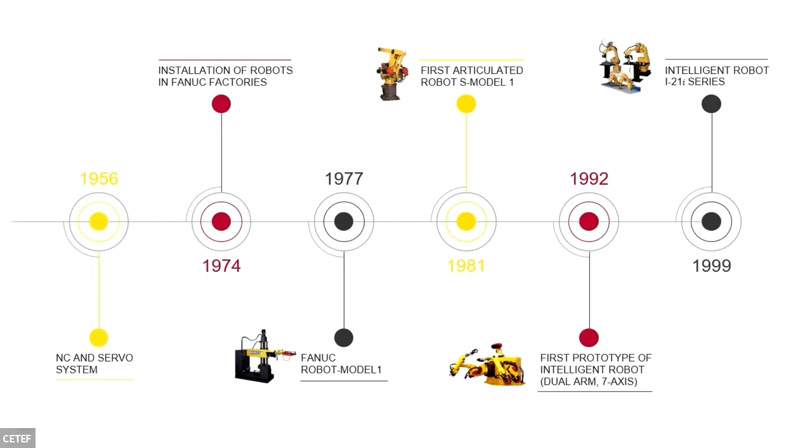Next, very quickly, 1992 was the prototype of the first so-called intelligent robot. What do I mean by intelligent robot? The intelligent robot is one that can observe the environment, measure things, sense and collect data, and take decisions on that basis. I will explain that a little bit later on. So it was the prototype of the first intelligent robot. 1999 is actually the first complete industrial series of intelligent robots. Let's have a look at what came further.

Starting from 2000, this series of R2000 robots is actually the most common and most popular of the FANUC robot family. These robots are mainly used in automotive tier 1, but not only - for spot welding, for heavy handling applications, these robots can handle up to, nowadays, 270 kilograms of payload. In 2003, FANUC moved on a little bit and created the first system without a human operator, for machine tending - the robot was standing in front of the milling center and was loading and unloading the part into and from the milling center.

2008 is the super heavy payload robots, the M2000. This is interesting, this kind of robot, my favorite actually, these are handling the biggest payloads in the world right now. This biggest unit can handle up to 2,300 kilograms of payload nowadays, and by the way, this is still the world record.

Later on, 2009, the Genkotsu robots. These are the Delta robots. You'll see some video examples in a couple of minutes. So these are quick robots, parallel linked robot arms for quick sorting, pick and place, and so on, for every operation that requires a really short cycle time.

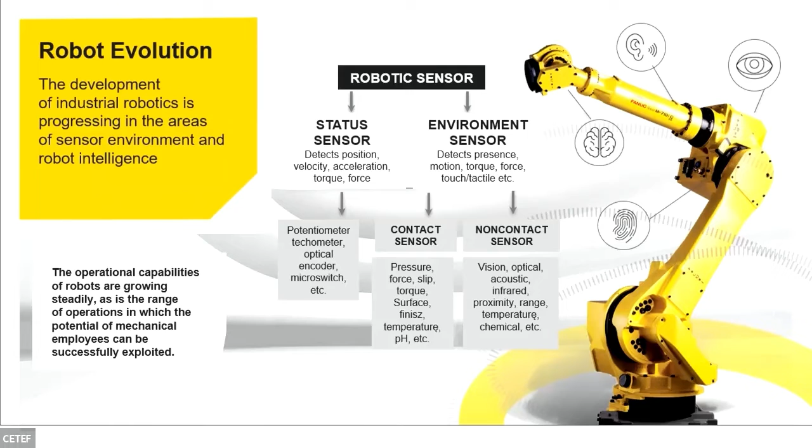But please note that during all of these years in the past, we noticed that mechanics is not as important anymore. Of course producers are still trying to design compact, lightweight robots and so on, but what is really important now is the software - the powerful software. As Jędrzej mentioned, artificial intelligence, all the sensing equipment - producers, with FANUC on top, decided to go with highly advanced algorithms to give the robots the possibility to feel their environment and make the proper decision on that basis.

But still, regarding the role of robots in modern industry, I think you're all aware that the design of robots, their construction, and the new models are dedicated to, or designed indirectly by, the market requirements. The market decided they want flexible robots. For example, it's no longer sufficient to have a robot performing the same task 24 hours and doing nothing else. What's really important and powerful now is, for example, the possibility to move the robot from one place to another and quickly adapt it to a completely new task. This is what really counts now.

For example, for this we have the collaborative series with the graphical teaching method, moving the robot arm and teaching the program like that, without writing any program commands. So this is really important now.

For sure, robots are still designed for handling heavier tasks, dangerous tasks. The robot can really help production plants deal with market fluctuations, especially with the lack of human resources. And what is the future? Again, working side by side, shoulder to shoulder with the human operator - that really might be the future. But we still have to remember, for some dedicated operations collaborative robots are perfect, for others they are not. We'll still have some examples.

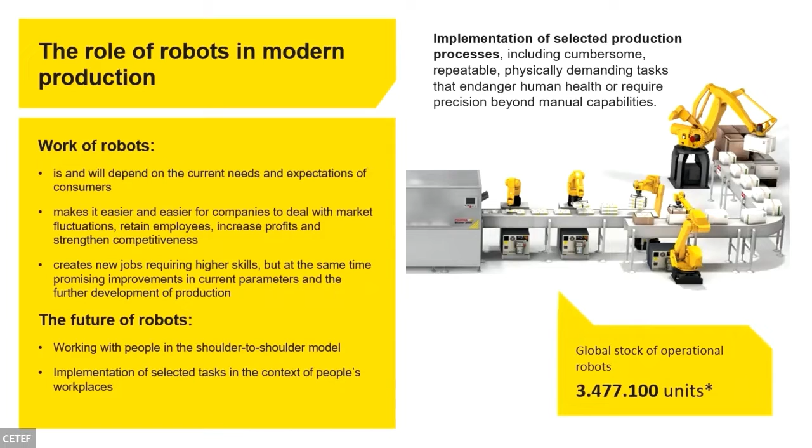By the way, this is an interesting number, as you can see in the bottom right corner - it's almost 3.5 million robots working in the world now. FANUC, by the way, has around 760,000 units installed in the world, which gives around 22% of all the working units in the world. So this is quite important.

Now let's look at the different kinds of applications and tasks performed by robots. If I were to mention the most commonly used applications for robots, I'd mention pick and place, palletizing, packaging applications. I'd also mention assembling applications, and processing applications like deburring, polishing, grinding, and so on.

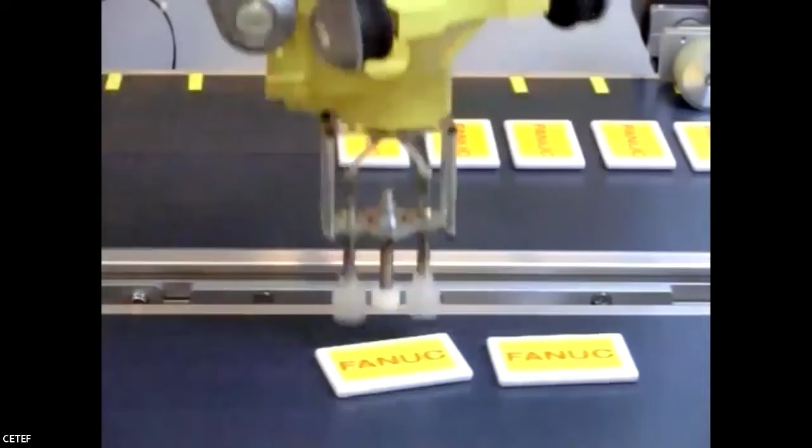What can be the example for this? It might look like this. This is a common, typical pick and place application for the Delta robot. As you can see, a quite fast unit which is chasing or tracking the part on the conveyor belt and picking the part without needing to stop the conveyor. This is a quite simple software package for it, called iRPickTool, which I'll summarize later. But this is a first nice example.

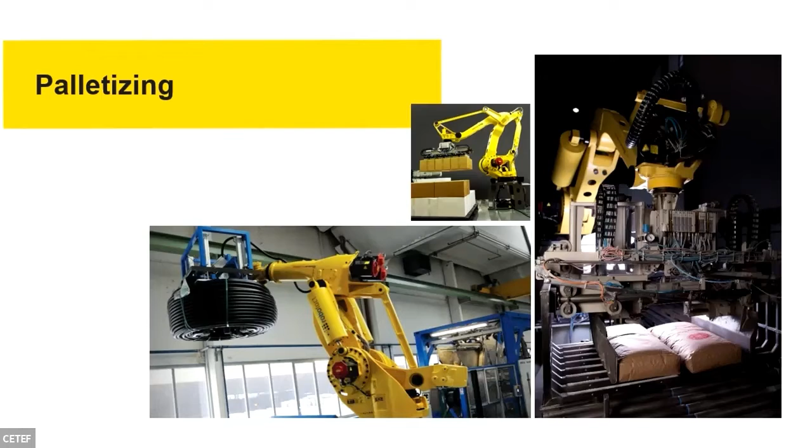We have a lot of palletizing applications. These are mainly heavier payload robots, 4-axis robots mainly, lifting up to 300, 500, 700 kilograms of payload. Quite common applications, for example in the food sector, but not only. So this was the palletizing application.

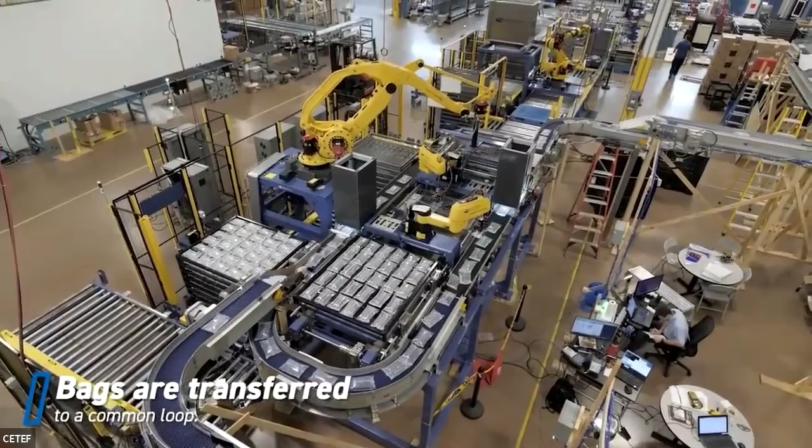If we look at some examples from industry, not only demo applications, we'd see applications where smaller units are doing the pick and place and packaging job - like the SCARA, 4-axis SCARA here, handling the bags.

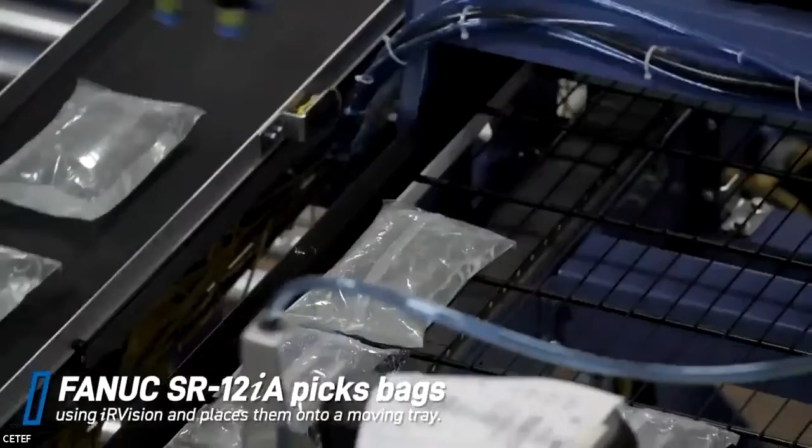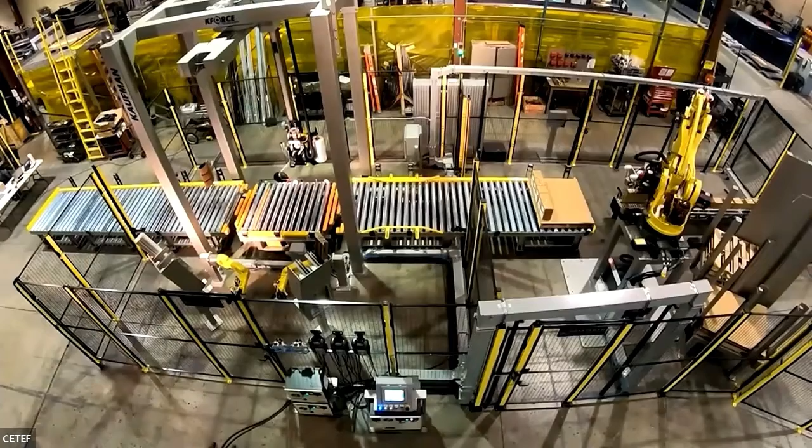I'll skip a little bit to save time. The second example is again palletizing, still staying in that sector, where the first palletizing robot is handling also the pallet, not only the product. So we're handling the pallet, handling the cartonnage paper sheet first, and then starting to palletize the products, for example cartonnage boxes or any other type of product. So this is the palletizing.

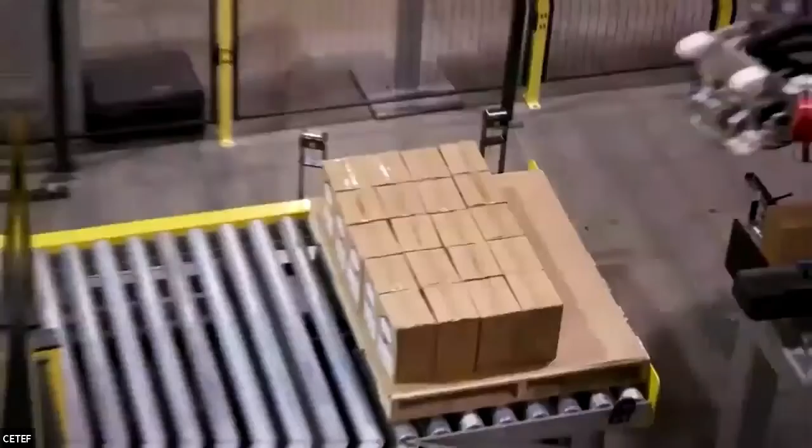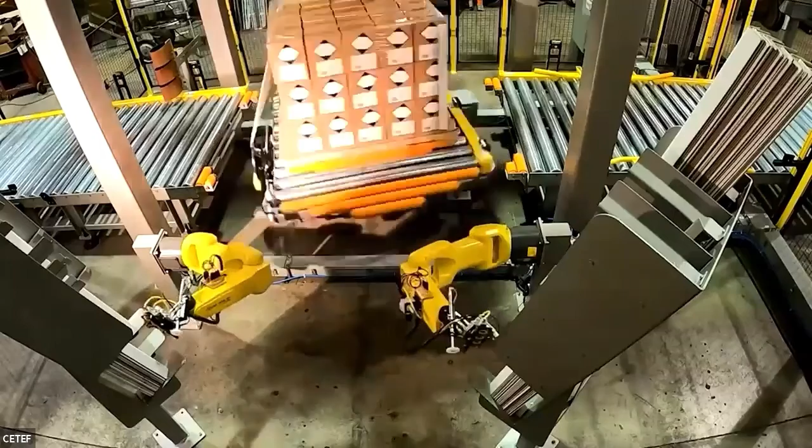As you can also notice, we do not have to grip the workpieces one by one. We can also take the whole row or the whole layer of products with the robot easily. After this, in this example, we have two small colleagues applying the cartonnage corners before stretching the pallet around. So this is a nice example of a task that's not really easy, especially in this case. They are using a vision sensor, but I will speak about the vision later on.

Next applications are again handling and machine tending, which might look like this: loading and unloading parts into, for example, the milling center, at least four milling centers.

What's interesting is that these robots are cooperating with each other quite close to each other. You might expect one robot to hit another. Some human operators even try to do crash tests between the robots, but the system will not allow this. This is another safety software package, an additional option for the robots to avoid collision between them. So the robots take care of themselves, not to collide with each other.

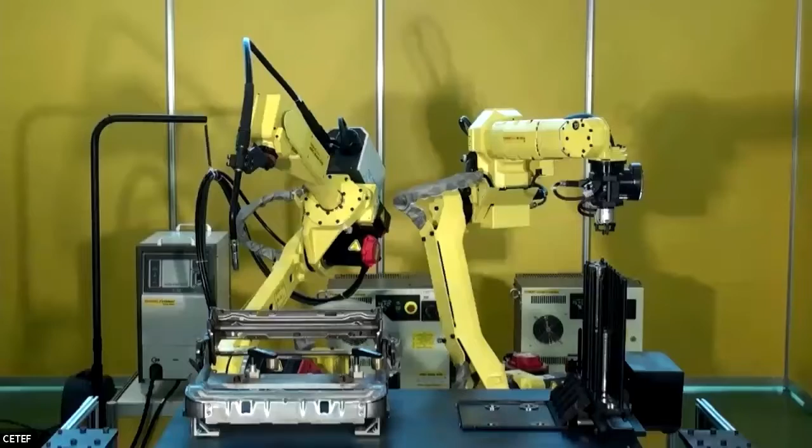This is another nice example: spot welding, arc welding, another typical example, especially in automotive but not only automotive. This is the typical arc welding application with the ArcMate series of robots, designed to do the arc welding job.

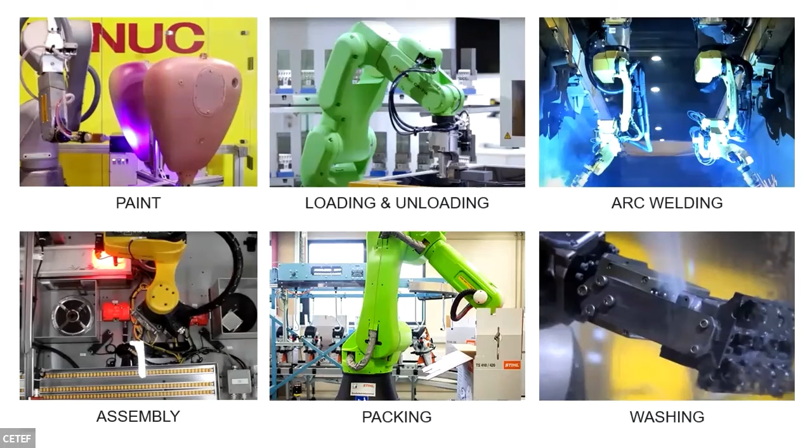And all the process applications like polishing, deburring, grinding, and milling, and so on. We'd have other kinds of applications like washing, assembling, painting, and so on. There are plenty of different kinds of tasks to do. These were, I would say, the most popular and typical we can imagine.

And what you can see now is the collaboration between the human operator and the collaborative robot. We have a nice example for this too, because if we compare the collaborative robot and a conventional industrial robot, there are some advantages and drawbacks.

The main disadvantage of the collaborative robot is that the unit is normally a little bit slower. Why? Because the robot has to stop immediately when physical contact between the robot and human operator occurs. So if I touch the robot, it has to stop immediately. You can actually test it — we have the CRX with us today, close to the main hall, close to the door. You can visit us and try the contact stop function.

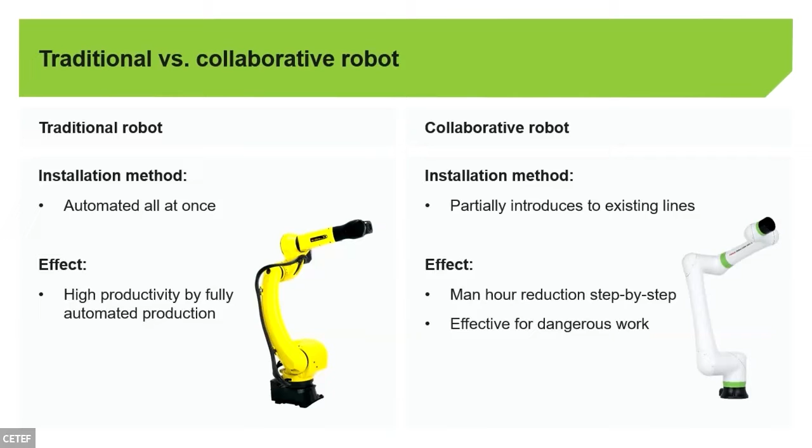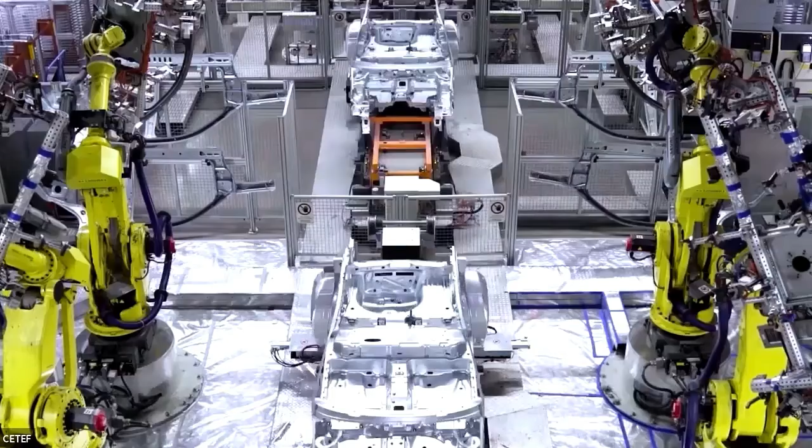But on the other hand, the robot does not require mechanical fences around it. We have a nice example for this too: if your favorite car is Audi, that would be a good example. I don't know your preferences, but in this case, this is a real case from the Audi production plant.

As you can see, there is plenty of heavy duty work for the robots, heavy tasks, typical repeatable applications like spot welding, arc welding, and so on. But you'll notice that Audi also decided to use the new approach to robotization, using the collaborative robot, this one.

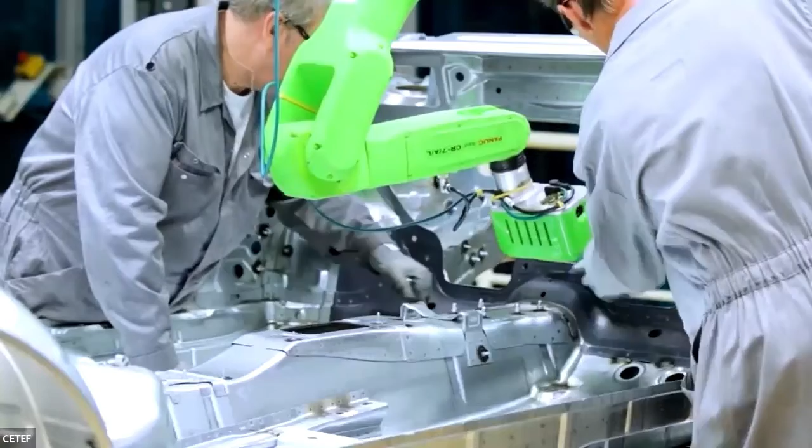In a few seconds you'll notice the human operators performing their job, doing their work, and the robot doing its job right next to them. They perform manual tasks while the robot does vision inspection of the process without stopping the work of the human operators. This is the idea of collaboration between human and robot in a full application.

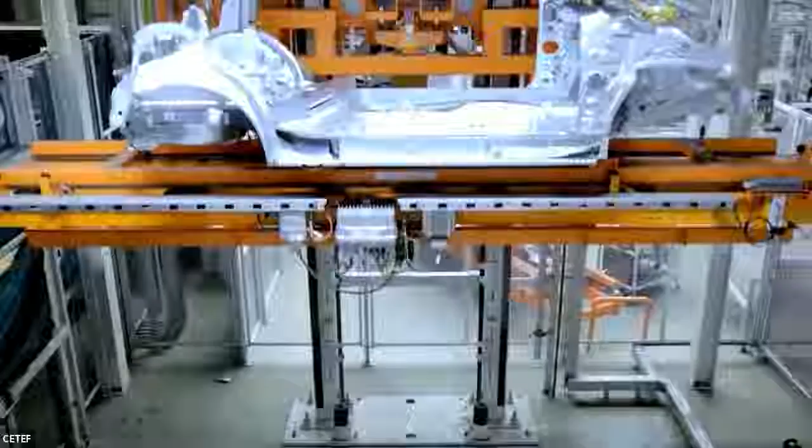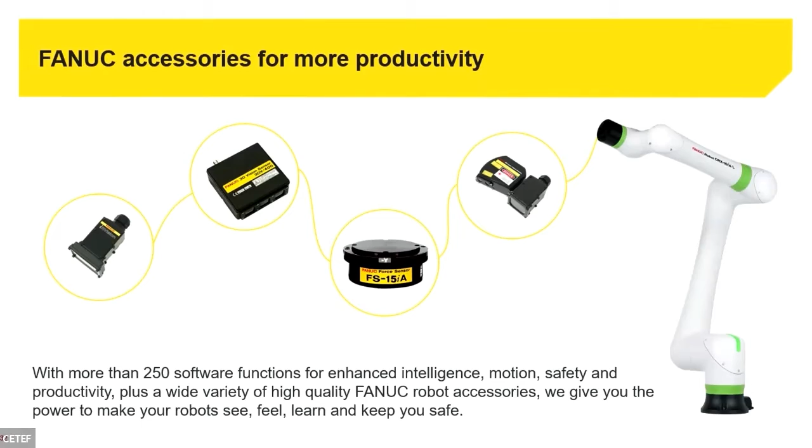Very commonly used additional packages for the robots are the senses. If we equip the robot with vision sensing and force sensing, then we can get a so-called intelligent robot. As I said before, we call intelligent robot the robot that can take its own correct decisions by itself. So in this case,

we can use the iRVision. It is called integrated robot vision. This is the vision system produced by Fanuc. We have this iRPickTool. You remember the example with the Delta with the fast application? It was the iRPickTool. It was the ready package for tracking the parts on the conveyor belt.

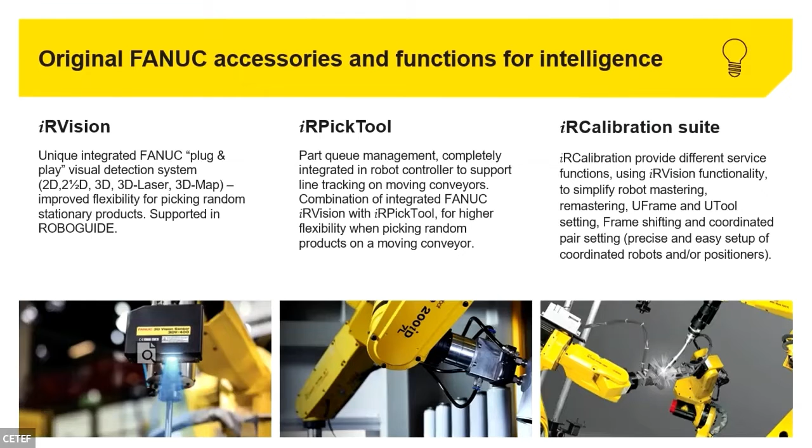And we have the iRCalibration, another vision-based software tool to make additional calibration between the robots. For example, I wouldn't like to go into too much technical detail.

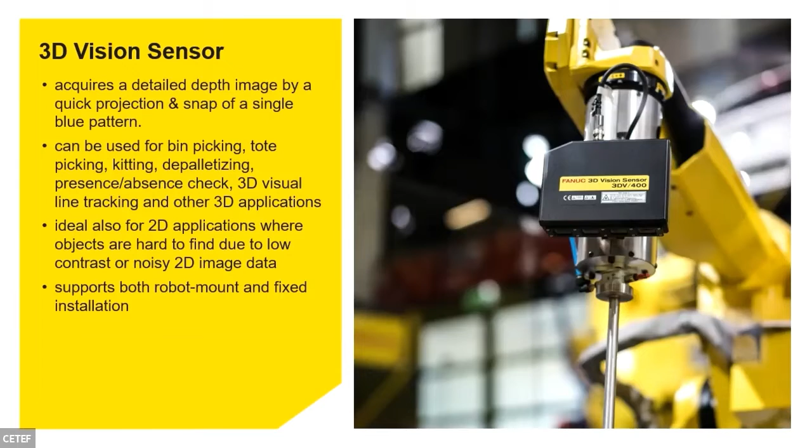So we have the vision options. As I said, 2D vision to locate the parts on the surface, on the plane, but we also have the 3D vision sensor. You could already see some example in the previous presentation, but here we are talking about the 3D bin picking application. So the robot is able not only to locate and find the part on the surface, on the plane, but it's also able to look into the bin and make the proper decision to take the part out of the bin and place it correctly on a dedicated place.

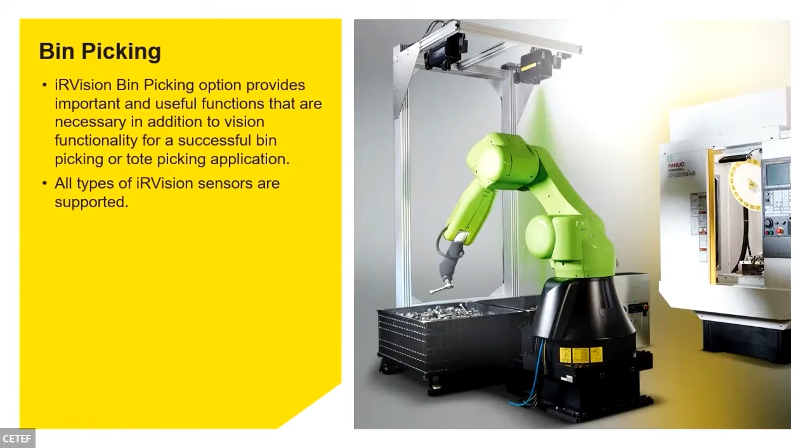Is it only locating? No, it might be also vision inspection. So the robot can at the same time decide if the part is okay or not okay. So the robot can perform control of itself and control of the moving parts. That was the bin picking.

How about welding? Another example. If the robot welds for a long time, for example for a couple of hours, then the natural thing is that the welding tip gets shifted a little bit or a little bit damaged. So what can we do in this case?

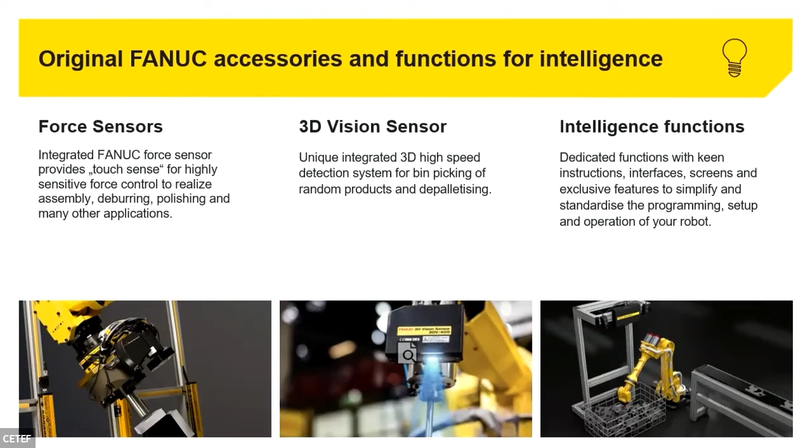We have plenty of these kinds of examples. Another example will be the force sensor. In case of polishing or assembling or applying any force to the workpiece by the robot, it can control itself, and the robot can also control the workpiece so as not to damage it, for example. So that will be the contact force applications.

And last but not least, hand guidance and the plenty of possibilities of teaching the robot new programs, new movements, by grabbing the robot arm and moving it by physical contact to the next position. So you do not have to be an expert programmer anymore. You don't have to know the programming code anymore. If you get a little bit familiar with the robot's new interface, you can teach the robot new tasks easily with this kind of approach.

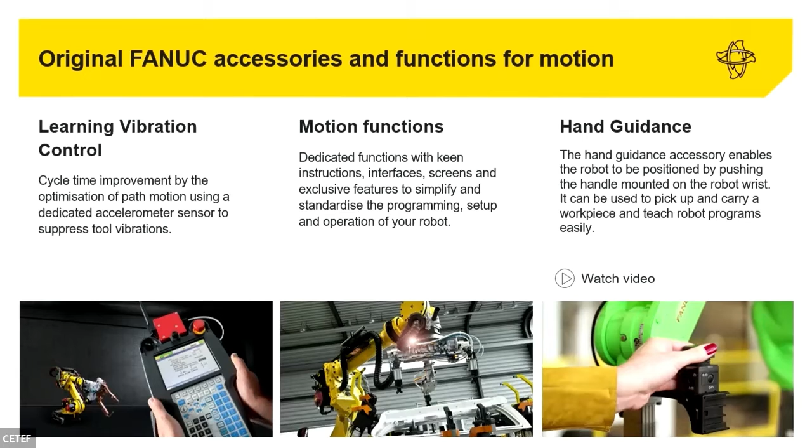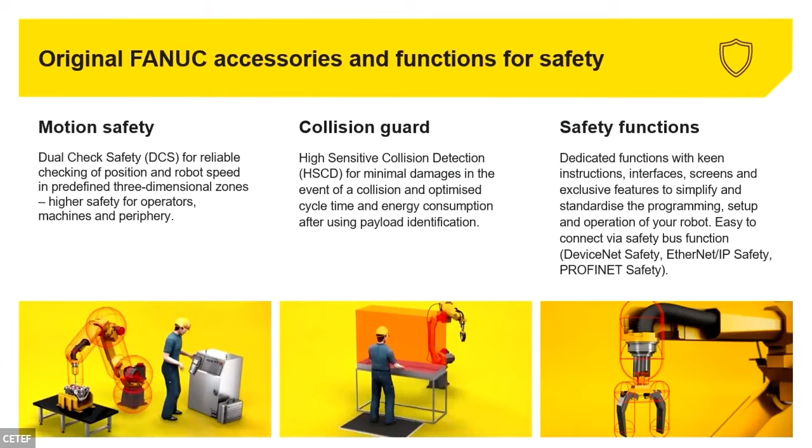And safety. Safety is actually crucial for us. The robot has plenty of options to keep the work safe. They are all at minimum category 3 or performance level D to keep the work safe.

And really last but not least, this is actually the last part of this presentation, the software and the possibilities of simulating the robot's work. We're going to have some nice presentations about digital twins today, but I will just mention that before even starting to install the robot on a production plant, we should always simulate the robot's work. In this kind of simulation environment, you can easily check the cycle time, the potential collision points, and even estimate the lifetime of the robot in this particular application.

So this was just a very brief story about the possibilities of the robots. I wouldn't like to go too much into the technical details, but I would like to stop here now. Thank you for your attention for this part of the presentation.

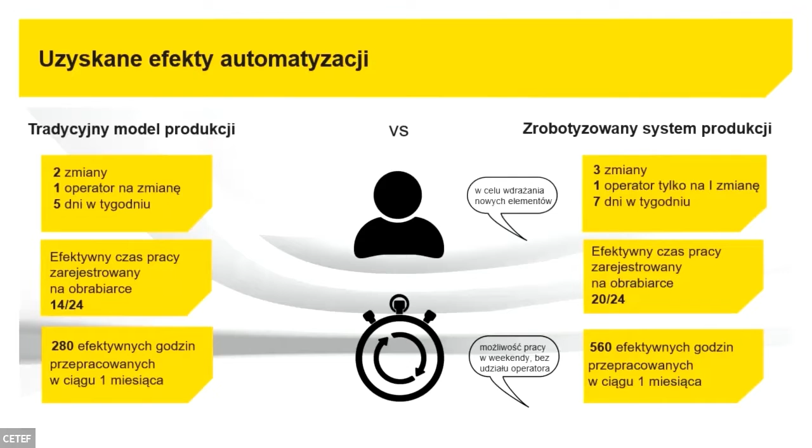Efektywny czas zmierzony na tym stanowisku pracy tej maszyny to było już 20 na 24 godziny, co dawało 560 godzin w miesiącu. Po wdrożeniu robota, po robotyzacji, mamy tak naprawdę 2 razy tyle.

I tak jak już wcześniej mówiłem, udało nam się, czyli to tak naprawdę klient wygenerował dodatkowe 280 godzin, dzięki robotyzacji, co dało mu w roku ponad 3300 godzin. Tak naprawdę takich godzin, w których on by bez tej robotyzacji w żaden sposób nie mógł wytworzyć, bo nie miał dodatkowych operatorów. Praca w weekendy też nie była możliwa.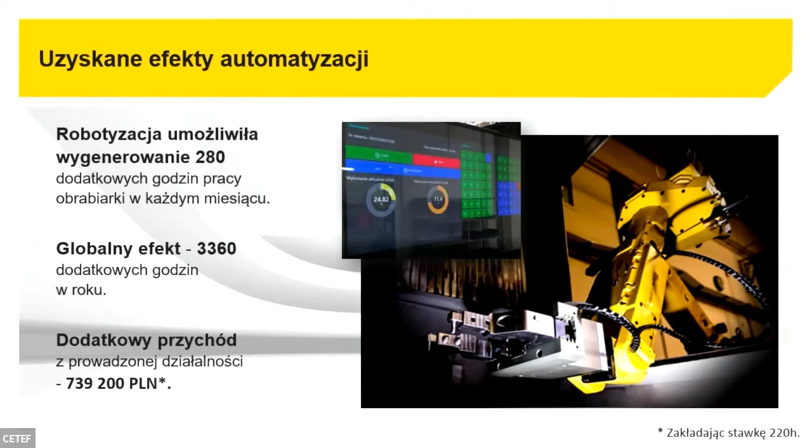Według szacunków klienta, wygenerował w momencie, gdy to stanowisko było wdrażane, ponad 700 000 złotych dodatkowego przychodu z tego stanowiska.

Wdrożenie robota do firmy pociągnęło za sobą jeszcze całkiem inne skutki, bo przyniosło inne pozytywne zmiany w organizacji. Dużą taką zmianą była zmiana świadomości pracowników, bo na początku ta robotyzacja była przez wiele osób jakoś odbierana - obawiali się tego, obawiali się, że gdzieś tam może być utrata pracy.

Ale po wszystkim zauważyli, że robotyzacja daje im możliwość pracowania troszeczkę na innym poziomie. Wcześniej oni musieli obsługiwać, jakby to powiedzieć, fizycznie maszynę, później ich praca była bardziej taka, mniej fizyczna, bardziej jakaś koncepcyjna. Bo oni na przykład wdrażali pierwsze sztuki, i nie jest to takie nudne.

Inną taką zmianą było to, że proces robotyzacji, czyli sam robot, też nie załatwił wszystkiego, bo tak naprawdę robot obsługuje maszynę. Ten proces robotyzacji wymógł na organizacji też to, że programy, które były przygotowywane na obrabiarki, plany pomiarów, cała organizacja musiała zostać dużo lepiej zrobiona. I żeby wykonać, żeby obrabiarka mogła tak pracować, organizacja musiała wypracować te metody i te standardy.

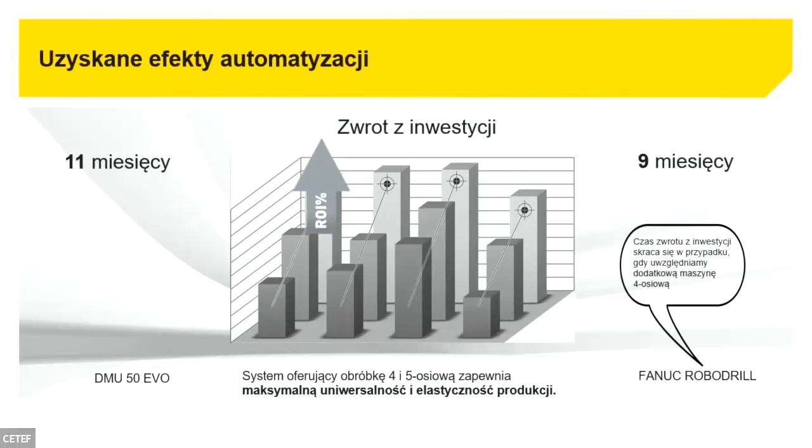Dobrze, teraz tak - automatyzacja obsługi tej obrabiarki nie skończyła się w tym momencie, w którym już ją obsługiwaliśmy, tylko powstał taki pomysł, aby w czasie, gdy robot stoi, oczekuje na skończenie wykonania elementów przez maszynę, wykonywał jakieś czynności. Biorąc pod uwagę to, że w tym całym koszyku tych elementów, które wykonywaliśmy, mieliśmy elementy zaworów na przykład.

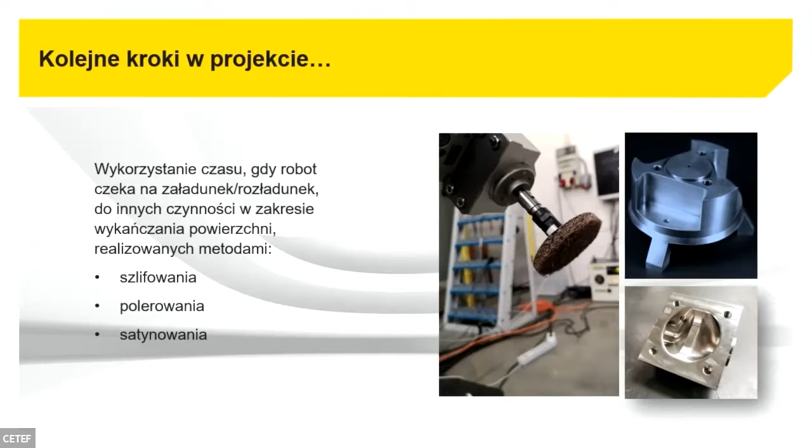Które wymagały obróbki później, szlifowania lub polerowania. Robot po prostu w trakcie oczekiwania na wykonanie kolejnego elementu mógł zacząć wykonywać ten proces, tym samym odciążając kolejne takie manualne stanowiska, gdzie to człowiek musi tą czynność wykonywać.

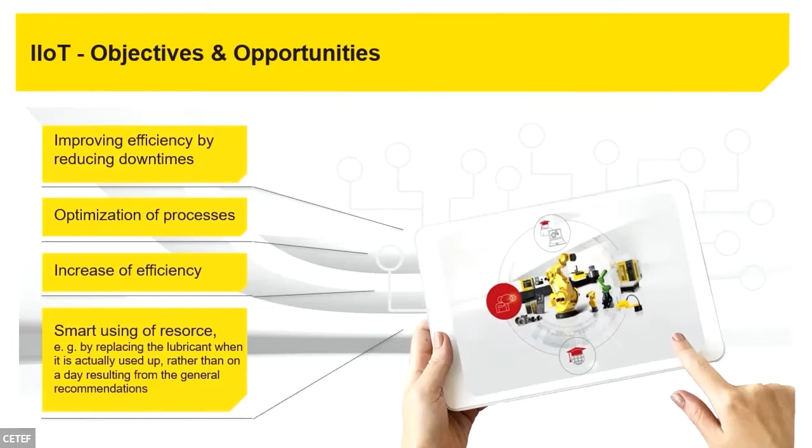So thank you and welcome again. As we already said, it's quite important to not only connect the machines, but to think what we can realize thanks to that and the software, the systems which we would utilize. So generally the industrial Internet of Things gives us a lot of opportunity thanks to the analysis of the big data, the raw data. And because these opportunities are so many, we need to think always about our objectives, our opportunities. Here are some examples, but what's most important is to prioritize them. Because quite often when we discuss with our partners, customers, they want to connect the machines, get the data, maybe monitor, visualize them, but for what? And then the problems come.

Because generally they don't know what the KPIs are, quite or even most important for them. So if we take a look at some examples of the factory, we've seen that on our shop floor, on the operation technology, we've got a lot of possibility to generate today the data, because almost each machine is equipped with some kind of processor which generates a lot of data. And then we can go back with it to some other software which could answer our needs.

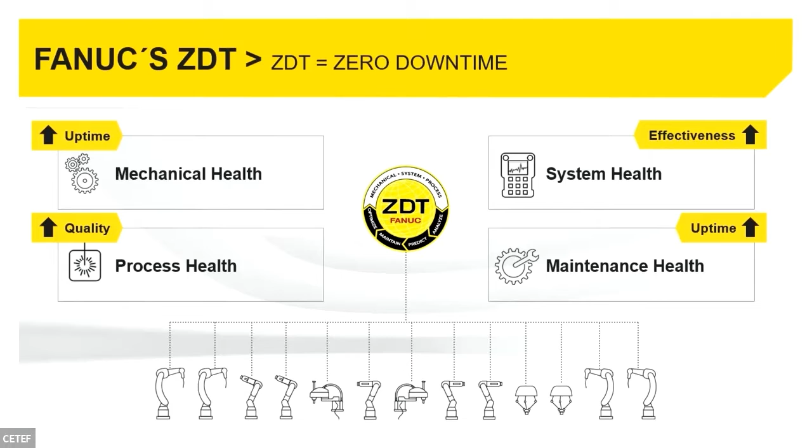As an example, just because it's too much to show everything, what we are focused on, how we do it in Fanuc right now, and this is our practice which we usually discuss with our partners, are three things. The first one is predictive maintenance, but not only. Thanks to the software ZDT, Zero Downtime, we can generally monitor the mechanical health, the process health, the system health, and of course the maintenance health. There was today a very nice slide showing the OEE, how it works when we use different types of maintenance and how we plan it. That's why one of the most important things is predictive maintenance, which offers us the chance to understand the mechanical health and general system health, and to get a chance to predict when the failure could appear.

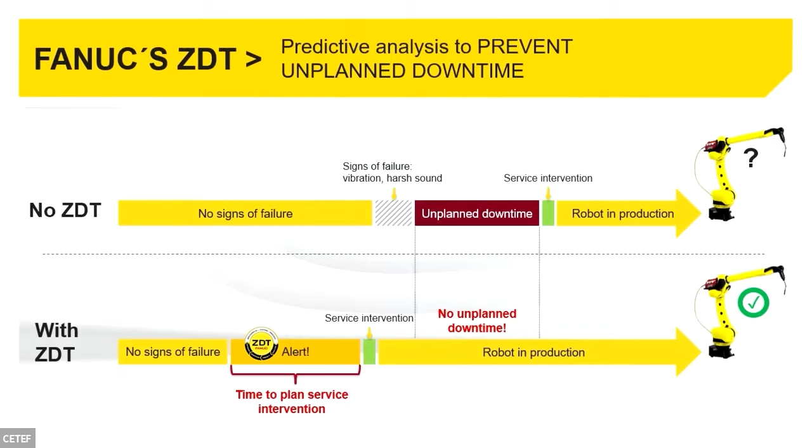Thanks to ZDT, we can find out any failure of the robots two weeks before it happens, and this gives us an opportunity to schedule the service intervention before the downtime, and we can save a lot of time during it. Downtime means not only no production and no money because of it, but quite often also huge penalties because we cannot deliver the production which we contracted. So the next thing is, of course, operational performance. We can monitor easily our status of the robots, but quite important topic today is also the power consumption.

The software optimizes power consumption usage, and thanks to the power consumption monitor, we can also understand our production. One customer was really surprised that the robot wasn't working one hour per shift, and asked why the robot wasn't taking energy. Generally, that was the time when the programmer was modifying the programs, but this could be easily done using 3D simulation software and just copy-pasting these programs to the robots. After some process optimization, the customer got one hour per shift more of production, and thanks to only this one hour, the software's return on investment was achieved in three months.

But as I already said, the robot is only like an engine in a car, it's not a complete car. We've got much more equipment, machines, like on the previous great success story we've seen, or for example the power source for arc welding robots. So we also need to monitor those parameters to see if the quality and the process goes correctly, and based on that we can optimize our production.

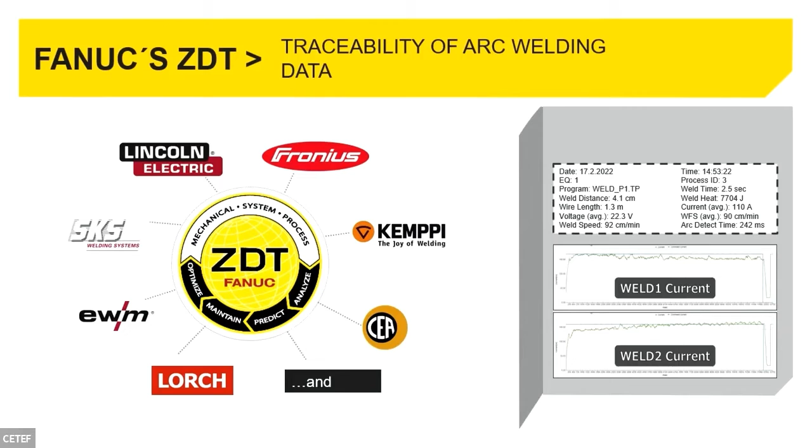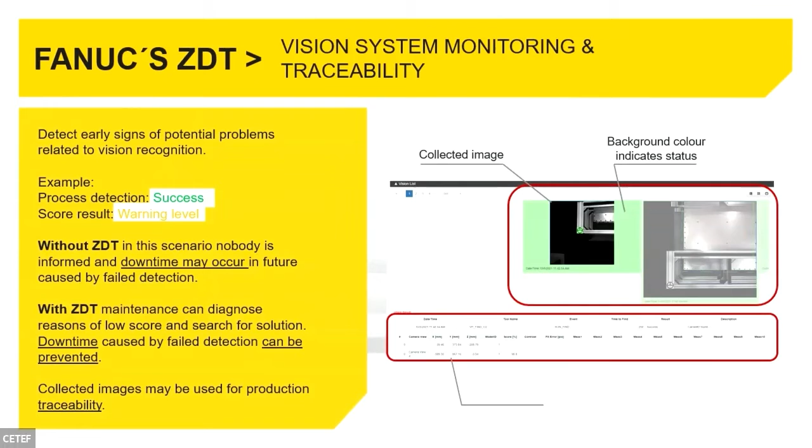Another nice example is vision system monitoring and general production traceability. Sometimes the scoring of the vision system goes down, and based on that we can react before the robots stop working entirely. It can be, for example, that the lens are dirty or something else around the system, but we can work on it.

So generally, we can think that software like ZDT is for the future. It can work with us for future steps. It's generally predictive maintenance, but also about future system status, and of course it's good to know our history and what's going on right now.

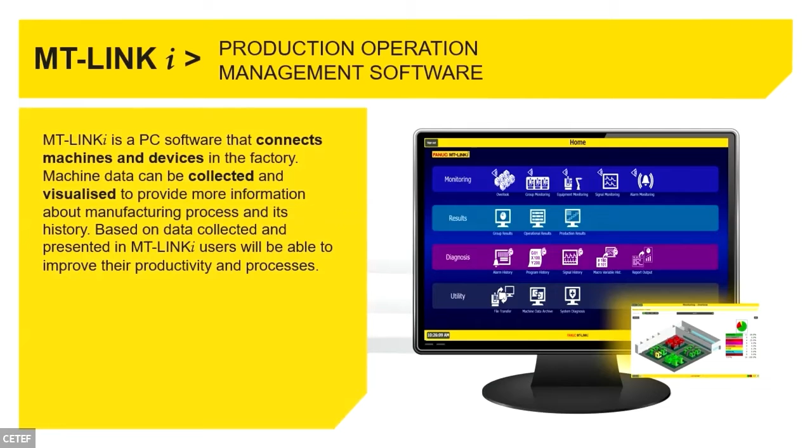The next example is MT-LINKi, which allows us to monitor all products, not only Fanuc, but everything that exists on the production side, to know the status, track traceability, and again analyze energy consumption - not only about the robot, but all other equipment in the robot cell. These systems are quite simple, easy to connect, and give us a chance to make our production more visible.

And what's most important, if you already set up your priorities, we can easily make nice dashboards to understand the situation.

As I already said, all machines around the world are more and more changing drive systems from hydraulic or pneumatic into just electrical ones, because of the energy, precision, and flexibility it offers. And many machines are already equipped with CNCs.

So we also want to focus a little bit wider. We can offer the AI servo monitor, which analyzes any anomalies that can appear during production. The system, thanks to machine learning, can completely set up the probes by itself, analyze, and find out what's going on.

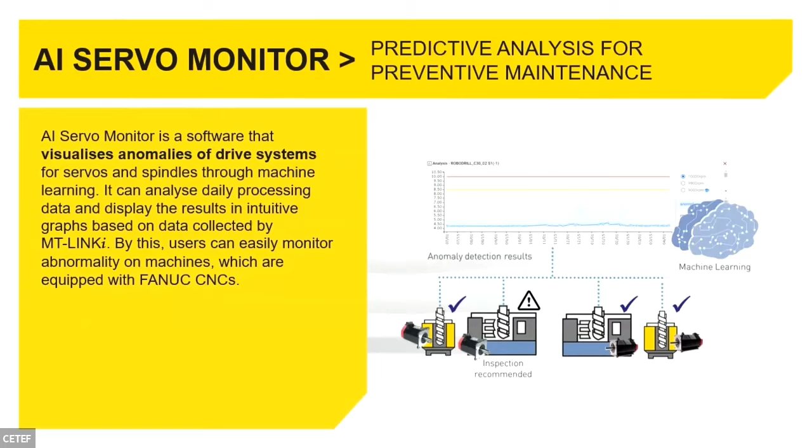Of course, knowledge about the production machine is needed, because even if we know that, for example, the current in servo motor 6 is not okay, for many of us this knowledge won't offer too much. But for the machine tool builder, this gives a great opportunity to check more details about what's going on.

So these systems are just examples - there's much more. We've got nice software that our partners, and even sometimes customers, create themselves. Generally, we need to think about how to reduce downtimes, because it costs a lot, but also how we can work on continuous improvement, as shown in the previous example, because without continuous improvement we can never keep up with rapidly changing times, and the system cannot be closed.

This gives us the possibility to increase all the growth factors of manufacturing, like OEE and other KPIs. But most important is to understand that production is very, very wide, and quite often, even today, we see that we connect not just our shop floor, but communication can already exist between factories, or between the producer and the supplier.

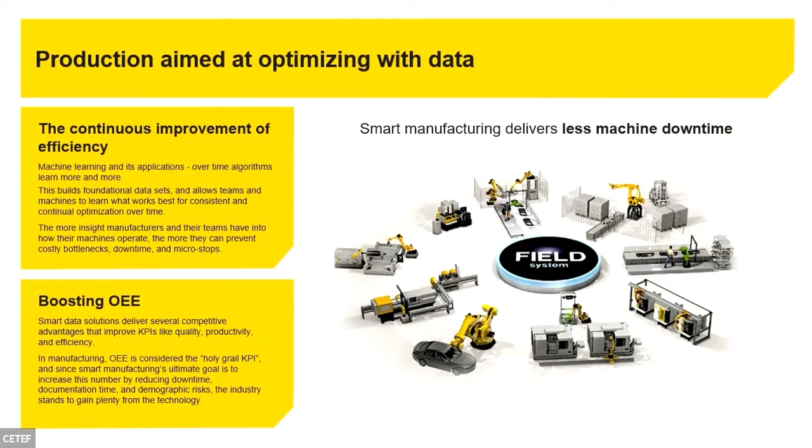So to close this and help you understand a bit more, I would like to invite Piotr, who will present a bit about the first platform in the world as a digital platform - a digital twin, but also a marketplace for robots - a really great opportunity to make it much easier to find out where we should invest and how to do it. Thank you.

Thanks. If I can still get on the remote - yeah. My name is Piotr Wiśniewski.

I'm the CEO of DBR77 Robot Platform, and I would like to draw your attention for the last couple of minutes. I know that after 2 days it will be pretty hard to take your attention, but I will tell you a completely different story.

We had 2 days, or actually one very solid day, of presentation about the technology, especially the previous one. I was not aware about such complicated things which we can use in our factories, but I would like to show you a completely different perspective.

But before I go there, there is a question. I will check how closely you are with the topic. How many robots do we currently have in the world? It was on the slide. 3.5 million. We have 8 billion people around the world.

So we are here because we would like to find a way to democratize robotization, how we can find a way to put more robots on the production floor. And this is the story of DBR77.

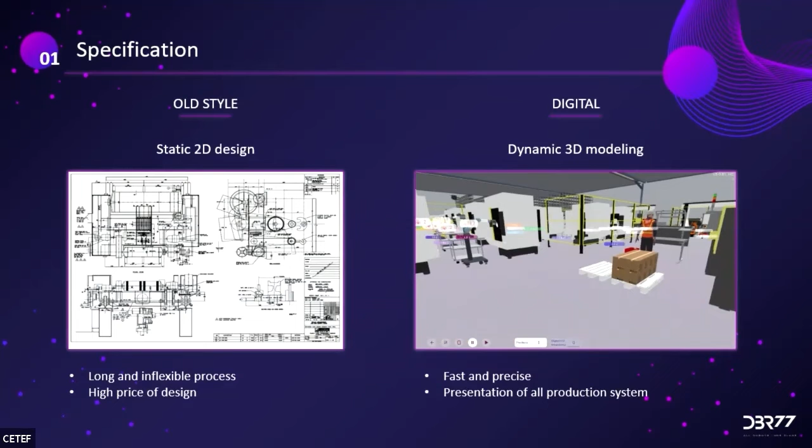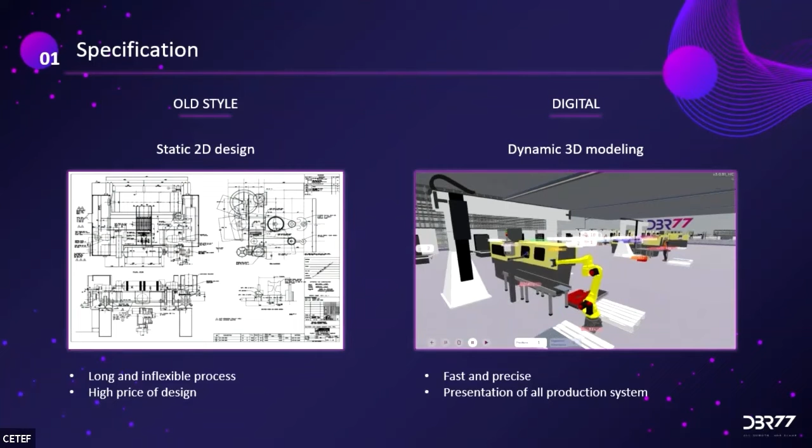Remember the first moment was specification. In the old world, the specification looks like on the left side of the slide. We had to create a lot of drawings, which takes a lot of time and a lot of discussion. First of all, it was static 2D drawing. Of course we can present many things on such two-dimension graphics, but this is static, and second of all we cannot predict many things.

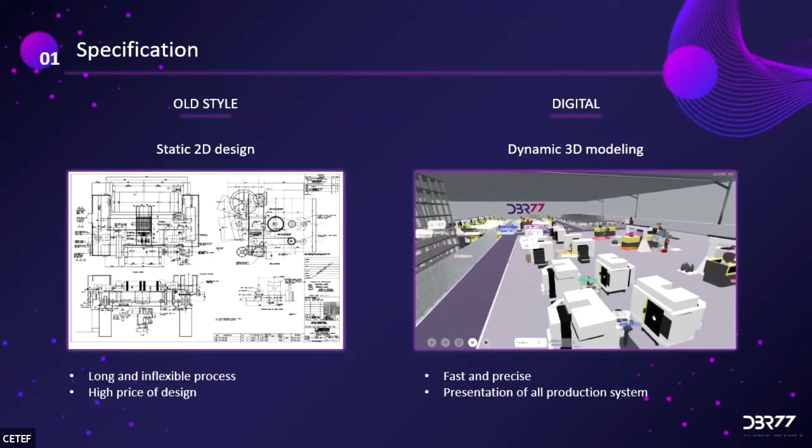So we launched our 3D studio, which you can see on the right side. Have you ever played any 3D games where you have to kill somebody? Many of you, I'm sure, are pretty familiar with the technology. In our 3D studio, it's very easy to take all 3D models, put them on the floor, and prepare the complete flow of material, people, or any kind of robots and machines. So we can make 3D dynamic design, which takes much less time than the previous option and can be much more accurate.

Let's go further. We also have our small AI, which can help us make a specification. We don't have to check 100,000 databases to understand what kind of investment we have to do. Our platform asks you what kind of production you have, how the production is organized, what is the time of the production, and a couple of other questions that are absolutely necessary to analyze the investment, so we don't lose so much time. That was the first step in how we'd like to reduce both the cost and the time of implementation.

Then technology. On the left side of that slide, you can see how the work looked 10 years ago. We spent a lot of time, which was pretty nice - I'm sure many of you have great memories from parties or events like that - but it was a lot of time and it was quite expensive.

Nowadays on our platform, you can find absolutely every kind of supplier of technology, thanks to our friends like Fanuc and Kuka - I don't remember if we still have the Kuka team, great. We have all global robot suppliers on our platform at that moment, and you don't have to call all of them or travel to any kind of events. All of them can suggest their technology on our platform, which can work pretty well.

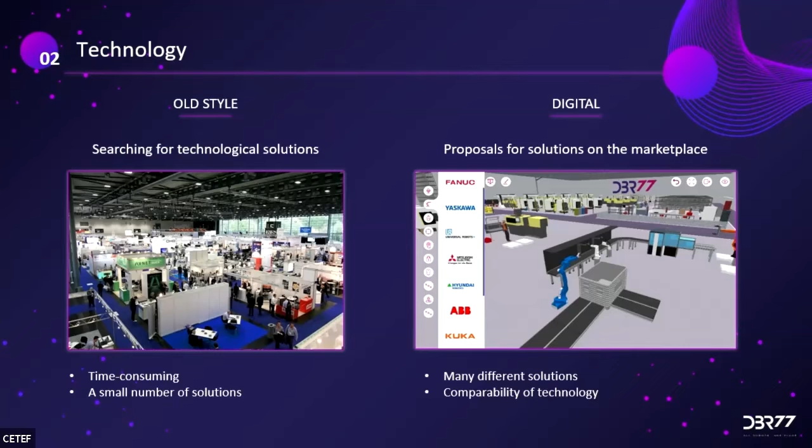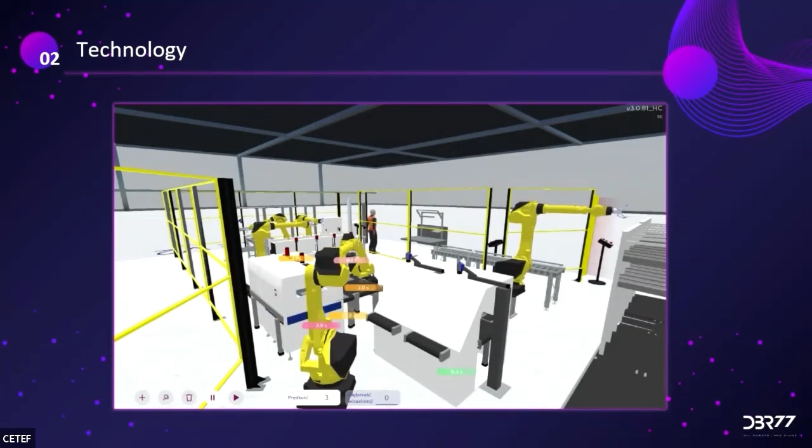And I have an example for you - that's the station you currently see, something very actual. It was prepared a couple of weeks ago on a Fanuc solution, but it was also prepared on different kinds of technology. Very easily we can check in the same place and compare which technology will be optimal for such a story.

Then we have to make a decision. As I said, decision processing in big organizations is always very difficult and time consuming because we have to compare. In the old world, we got a lot of offers prepared in different programs by different people, and we were not able to compare them. On our platform, it's very easy to compare any kind of offers prepared by many different suppliers and integrators. We compare the concept on 3D models, and mainly we do financial and operational analysis - we can compare what the payback time of the station will be, or the impact on OEE, the topic discussed so much today. So we can make the decision process much faster, and this is also game changing.

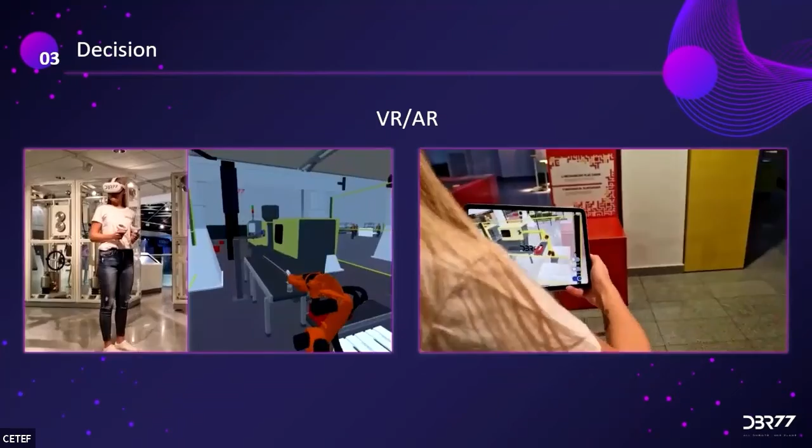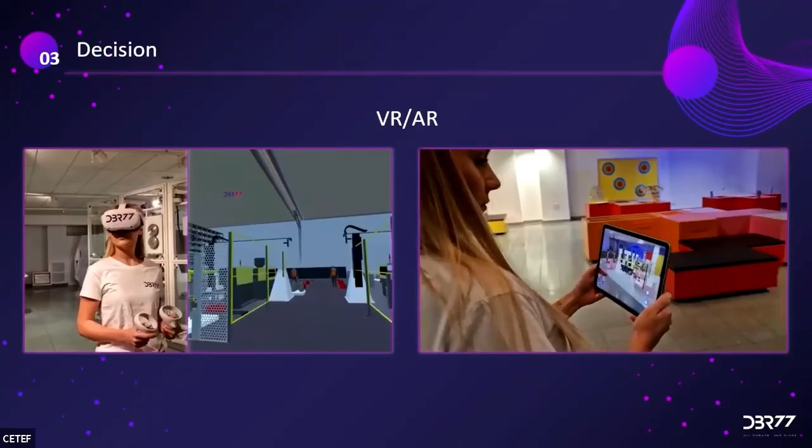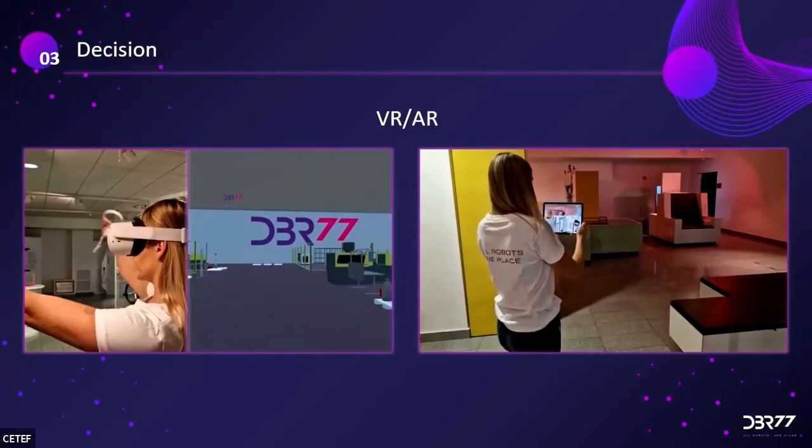We spoke today a lot about digital twin - perfect - but what was prepared by us on our 3D studio, on PC, can also be presented on VR and AR. AR is a great solution: if you want to see if a station, robot, or some other technology will match your production factory or line, you can take a tablet, smartphone, or Google Glasses, go there and check how it will match the existing infrastructure. But VR is really game changing, because everything designed in our studio can be entered completely in that virtual world. You can be immersed, and very easily move every single machine and people, and make a complete analysis of the concept.

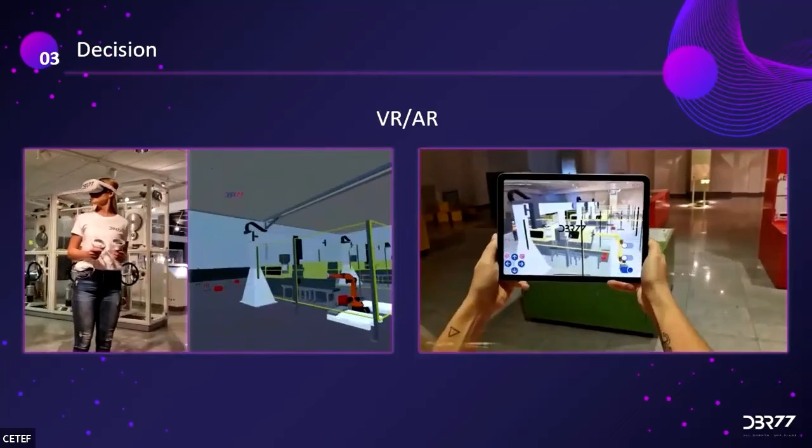What is also important, it takes seconds to make the synchronization between networks. So it's pretty easy to make the decision that we have to go with contracting.

In the previous world, we discussed a lot. Lawyers can take a lot of time and cost us a lot. Many of our partners complain that they never know how to do the business, just lawyers and lawyers and lawyers. What we did on our platform is organize the whole contracting part.

We have standard documents, and very easily and very quickly two sides can make a deal, and it works pretty well. This is a slide we are particularly proud of, because there's a number and list of our partners. If you want to buy the technology from one of them, it can be done by our platform. So you can see how easy the contracting can be.

Then the fifth stage, the moment, was implementation. Our platform helped a lot. We have a whole project management system there, so all projects can be tracked.

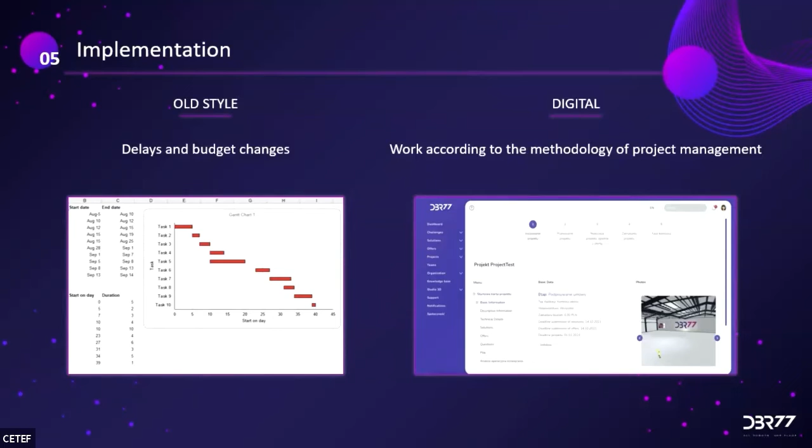Also important, which I cannot mention so much in that presentation, is that when you want to buy a solution for our platform, you can compare and you can compete. Of course that means you can buy the solution much cheaper than in the previous world. And the last point, very specific and important for our meeting, is our concept of Lean 4.0.

This is our digital twin with our AIs. When finally we have that station ready, and the robot is implemented, we are happy, everything runs perfectly. The next day we should ask ourselves how we can operate better, how we can reduce more time, or reduce the minutes the station was stopped.

In the old way, before digitalization, we had a procedure we called VSM, value stream mapping. How did it work? Guys from automotive know that perfectly. We have to find long batches of production, then we can make a complete analysis step by step, what is the timing, calculate where the bottleneck is, and focus our lean methodology on the bottleneck. That was the story for the last 30 years.

But the problem is the world changed a lot, and our batches of production are much shorter at this moment, so that concept doesn't work so well anymore. So we had to find a solution, and this is exactly the concept of Lean 4.0.

That concept is quite simple. We collect data from any kind of equipment, any kind of source that creates data. What exactly does that mean? We can take data from robots, from machines, from our final goods or materials rotating in the factory, and finally we even collect data from people, from operators, where they are located and what they do.

I can give you some examples. A couple of weeks ago we finished a project where one of our clients checked the operators, what they were doing, and recognized that 2 hours and 45 minutes every single shift, the average operator was not at his place. That means more or less 30% of the salary he took was for completely nothing, because he didn't work. So we can make such analysis, and that's important when we have data.

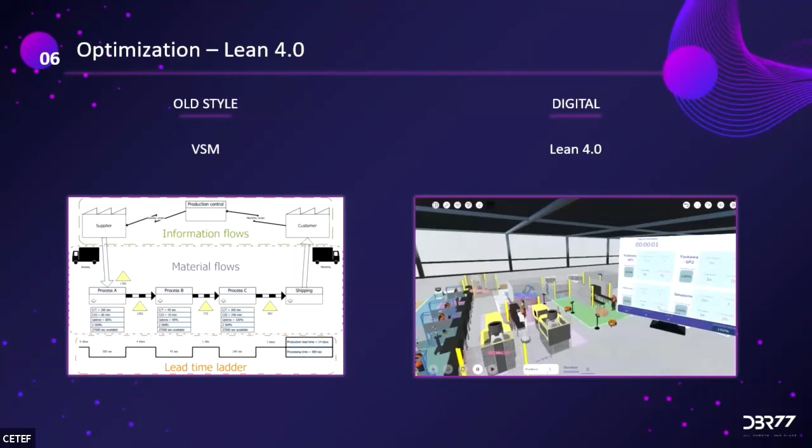In the next step, when we collect data, we can make reports in MES with a perfect analysis. When we do the analysis in 3D Studio in the digital twin, as you can see here, we collect all kinds of data. We can simulate the complete system of the factory and also the warehouse.

So in the next step we can make a plan for how we will operate. What kind of planning can we do in our 3D digital twin at that moment? First of all, we can do a production schedule. Also in the middle-term production schedule, we can make scheduling per line, analyze who should work where, balance lines, and make a complete analysis of the intralogistics, which material should be where and when. And importantly, we can do it exactly at the moment the information changes.

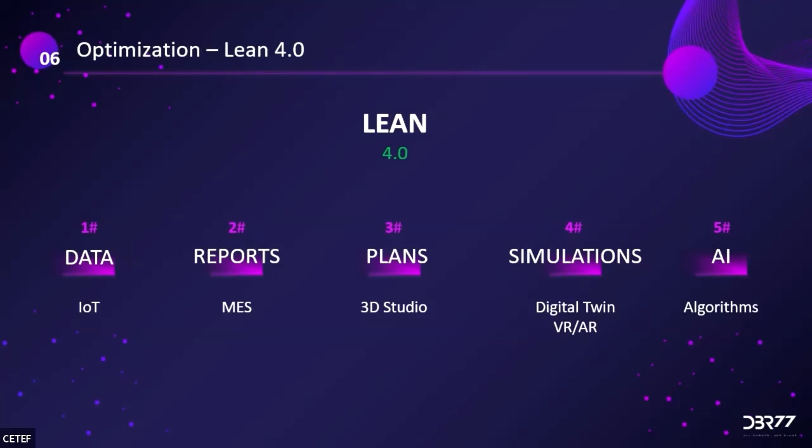So when we have the planning, we can make a complete simulation. And simulation is almost AI, because when we can simulate, we can recognize which solution is optimal from the perspective of the numbers. So we have a digital twin.

What is the story with the digital twin? Why should we create digital twins for our factories? Because we can finally treat it this way, and you can believe me, it was impossible 3 to 5 years ago. This is happening now because of the technology which is in our range.

We can make the complete visualization of the system on the production. We can make simulation, which means we can avoid a lot of mistakes in the planning of the new line, but also in the new factories. Currently our platform is used mainly for that. We can make a simulation of production cells, complete lines, warehouses, intralogistics, and sometimes we do digital twins for complete production factories.

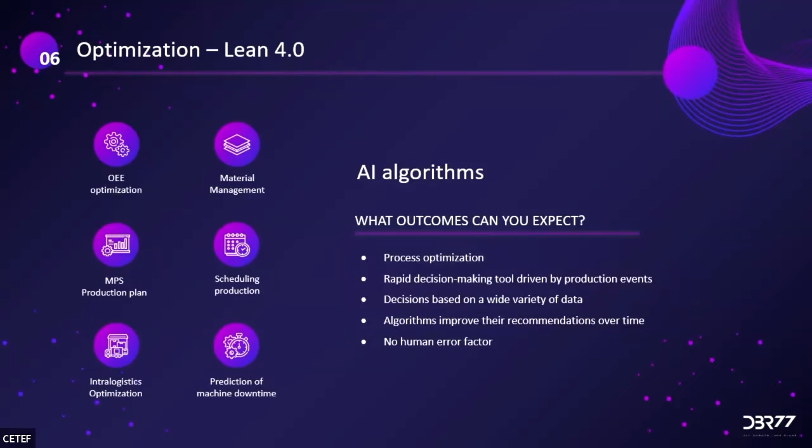But digital twin without AI, this is let's say 40% of the job. So we have algorithms, which I explained a couple of minutes ago, which can help us make the decision in the right moment, in the right place.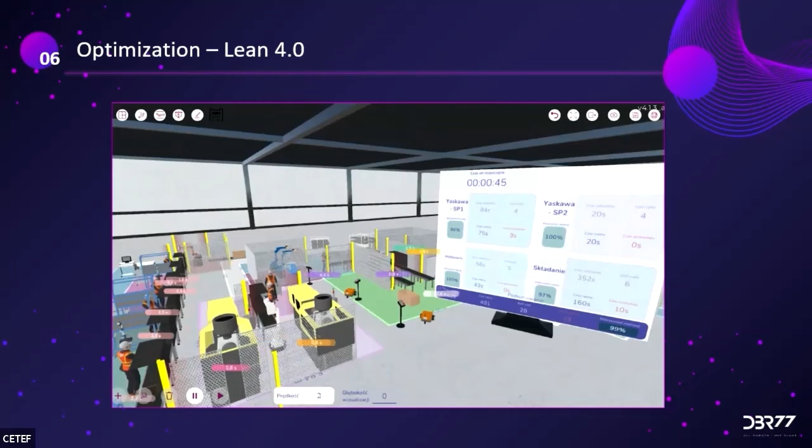And now you can see how digital twin can look. This is one of our cases where we present exactly the complete production flow, times, what people do, and on the right side you can see simple reporting of what the stations were achieving. And this is the result, if you can look at the screen.

We can now, and there is data from our platform, do it in 2 months, to run many cycles of discussions and negotiation with engineers from many different suppliers. In 2 months we can achieve the level of knowledge about the future technology for our plant that normally in the old world took at least 6 months.

Then the decision, especially in VR, I have to tell you that all bosses, when they are in VR, they see, wow, this is the concept, we want to do it that way. So the decision is made, and it's normally made much faster.

Contracting we reduce from 6 months, from 3 months to 1. Implementation we reduce from 6 months to 5, and finally optimization we reduce from 6 months to 3 months.

But in fact this is a process which never ends. What is the result? The process which took 25 months normally now takes like 12 months, like 1 year. And we were also able to reduce the cost by 30%.

And this is the last slide. What we did, we created a marketplace with digital twin, which is able to reduce the level of investment by 30%. We can reduce the time needed for implementation by half. And what is also important, the average efficiency can be improved by 20%. And as you can imagine, there is no investment in any kind of machines, only the knowledge which finally can be used on our platform.

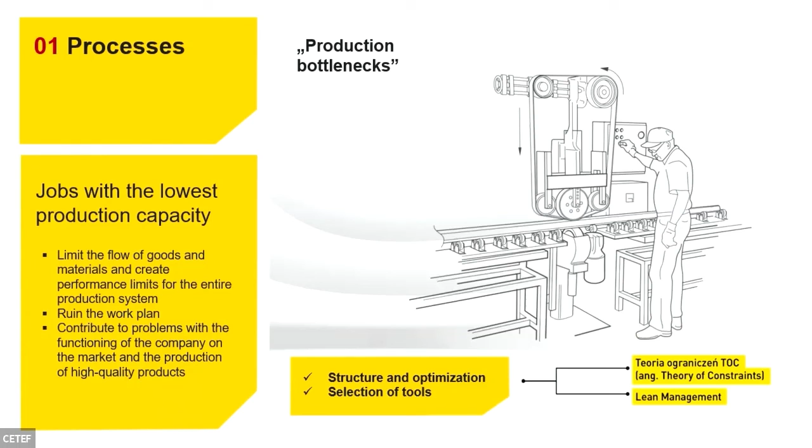That's why it's so important to find out bottlenecks, and also to think generally how we produce. Many times we look at OEE parameters, but quite often even if the OEE is okay, the question we don't ask is: what is the cost of such good OEE?

Because sometimes the customer knows this is the bottleneck, the OEE is 90%, but the question is whether the investment at this point is too much. So we really should analyze this very deeply with financial people.

As in my first presentation, we said that manpower is returning to the factories, which is very important. That's why we need to secure resources, not only for the investment steps of who will utilize the system, but also how it can support our people from the safety point of view.

Maybe the greatest added value of robotization was the change of technical culture generally in our manufacturing. This is also a very important point.

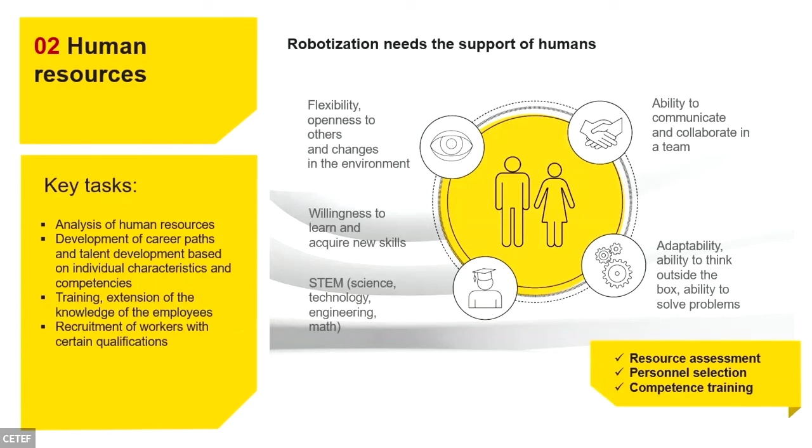And again, we're back to the processes, because quite often one process on the production line that starts to be automated must also have very well prepared production in the steps before it.

We really like to work with data, hard data, not promises and general marketing. 'This is great, this is easy to program' - such marketing things are nice, but we always like to calculate everything, because every investment can be quantified and analyzed very deeply.

And this is also not just about the technology, but also about the partners who will deliver it - the system integrator, robot producer, PLC producer, and everything around it, maybe software, connectivity and the platform. All those things must be really well and reliably matched, depending on your business needs.

I've mentioned this a few times, but one of the toughest points is the connection between the IT world and the OT world. Not because of technical features, but because of us - many times people from IT cannot understand OT and vice versa, and it's very tough to discuss, because when we don't understand something, quite often we just say no. This is the simple way to stop the investment.

That's why education is such an important thing, to understand how to proceed. And just after analyzing all those points, we find out where we are and how we do it.

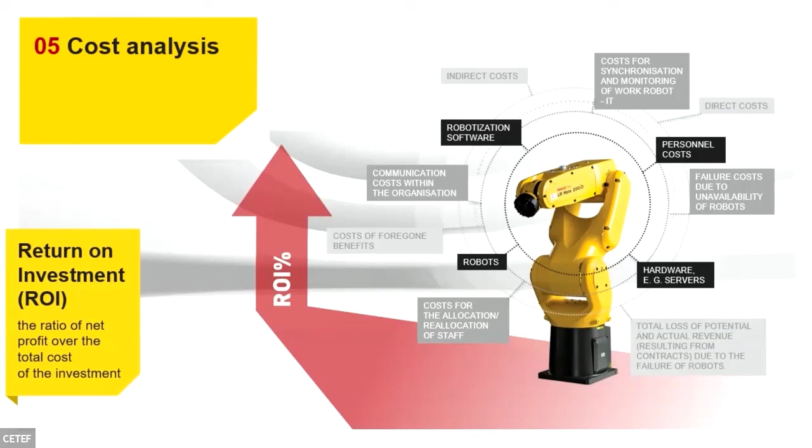We've seen great 3D visualization, which thanks to DBR77 speeds up the investment very much. But only at the end of it can we really make a return on investment analysis and answer the question: is this a good place to invest.

As FANUC, we use a ROI calculator quite often. We are still surprised that changing or reducing manpower is not the main factor that drives the results of the investment, but rather the production volume increase.

And of course, if there are customers who don't know how to sell more of one product, there's a bit of a problem. But if somebody can sell more thanks to the same production, the capacity increase makes the ROI calculation the best one, because we simply earn much more money per unit.

Quite often the production increase thanks to robotization is not even just 20 or 30 percent, but quite often we are surprised that it's really double or even more.

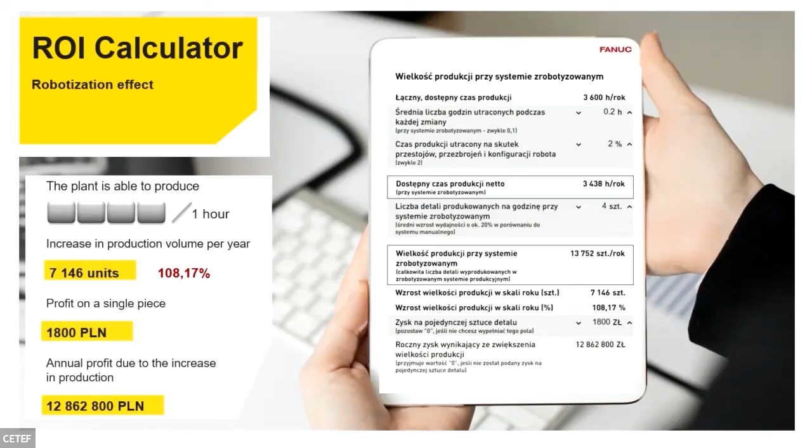So we're always open to discuss investments, but we understand that we need to prepare for it, and it's not changing from one day to another. Even as FANUC, for example, we have one servo factory which is fully automated and can work more than a month without any human touch, but generally we were working on it for almost three decades. So the change from a standard way to full automation takes time.